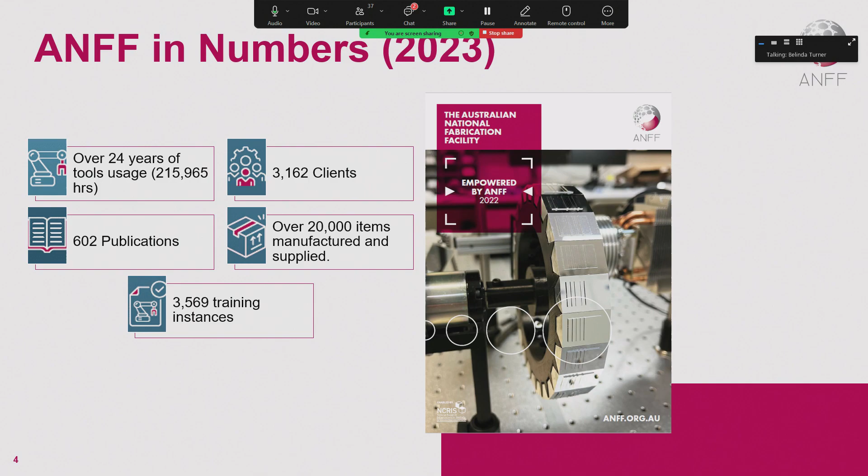So the federal government, the state governments, the universities pour money into this so that you get access to the people and the tools that get your research to where it needs to be. This is an incredible program, one of the most unique in the world when it comes to research infrastructure. This happens not just in micro and nanofabrication - it also happens in microscopy, astronomy, urban databases, environmental monitoring. So there's a huge amount that's not just in this area. If your research area needs help with research infrastructure, there's probably an NCRIS capability that can come and help.

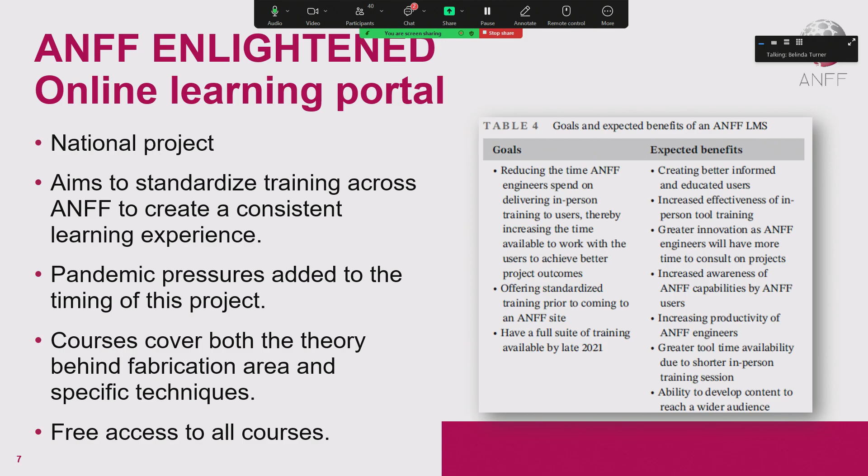So feel free to jump on there, get some of the basics from some of the things that you didn't get access to this week, because you're here for 4 days. This is a packed 4 days, but there's so much more out there, and some of that is available on ANFF-Enlightened. It's free. There, the button. That's where the button is on our website.

So this is our initiative to try and get some of the research projects that we know have market potential a little bit of a leg up, to do a manufacturing feasibility study to show an investor that this can be made at scale, or a market analysis to show that there is a market that will pay for this at the level it's going to cost. So we're trying to do that with some of the projects going through.

And with that, I'm going to stop talking and introduce you to your next speaker. Yeah? Okay, so I'm just getting the nod. So our next speaker is from the state government here in South Australia. Dr. Judy Halliday has been instrumental in supporting research infrastructure and shaping how that investment is coordinated, how that investment is going to bring value into this state. She has a long history in being a friend, for want of a better word, to the research sector and the innovation sector. And she's going to talk today about how innovation is essential in a complex and uncertain world. So thank you, Judy.

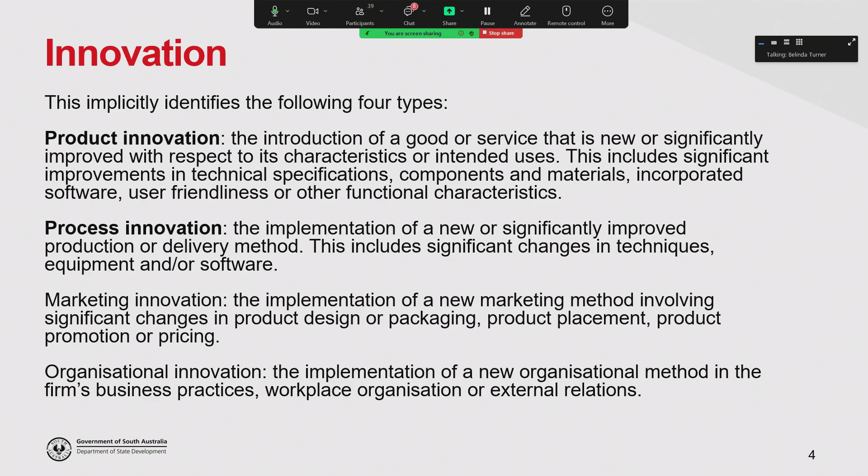However, out of 43 countries, Australia is not in the top 10 for having lots of innovative firms that develop innovative products and services. As a percentage of total firms in Australia, about 21% would be considered to be innovative. Let's think about Canada as a good comparator for Australia. It's a similar sort of country in that people kind of live around the edge and there's a lot of digging dirt up and mining and farming. Canada's probably a bit more economically similar to Australia than some of the other comparative countries you might hear about when we talk about innovation: the United States, particularly Silicon Valley, or Israel. Finland is another one, but Canada's probably a bit more like us.

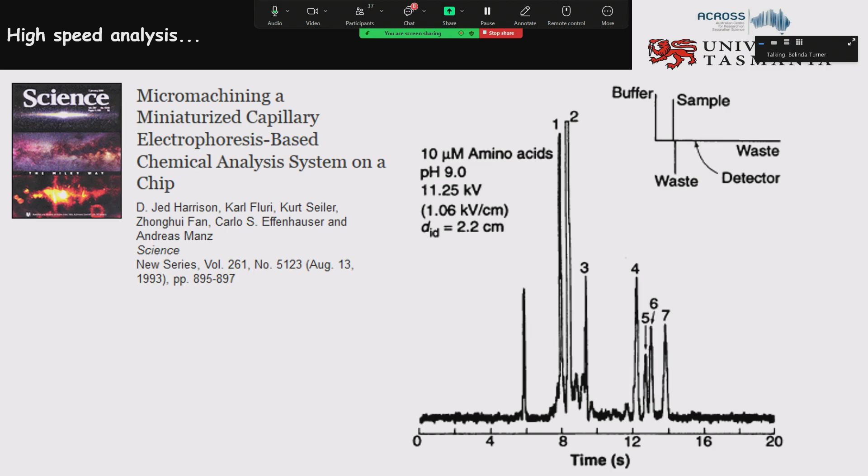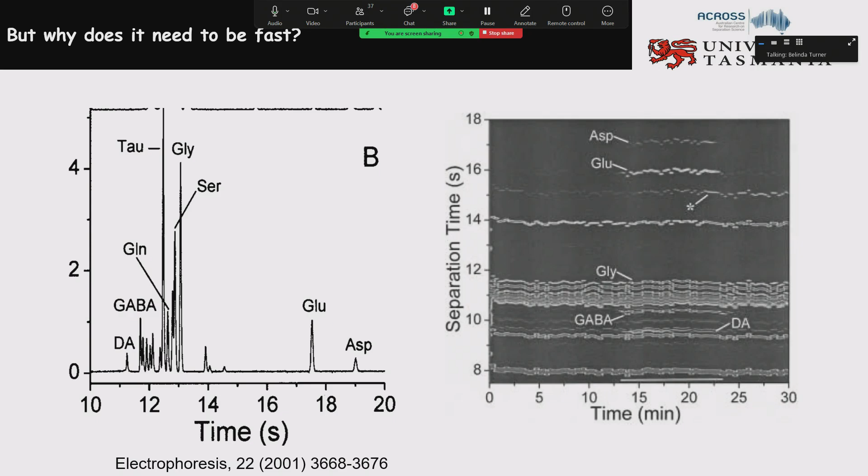So we can now understand brain chemistry because we can do this highly integrated measurement in a really quick format. Why would we want it to be portable? Right? So one of the advantages of making it small is we can take it everywhere, right?

You guys are probably too young to remember life before mobile phones, where you had a landline, you might have seen them on television. Some of us might be old enough to remember the first mobile phones were about the size of a brick, probably weighed about the same as a brick. And now we've all got them really small, right? We just throw them around everywhere because they're super light. We drop them and they don't break, right? That evolution in technology to portability, why is that useful?

So one of my favourite examples of why we want to make chemistry portable is to send it into space. So if we send it into space, and this is particularly looking at amino acids on Mars, to answer that really critical question that everyone wants to know: is there life out there? So if we can take something and send it to Mars, we can actually find amino acids, right? Problem is, it's really expensive to send stuff to Mars. So if it's really heavy, it's not going to go well, right? So you want to make it really small, you want to make it really light, so that you can get it there and answer the questions you want. Right? So size is really important.

One of the things that we often don't think about, though, is this little thing that we've made. How do we use it? And this is called the chip-in-a-lab syndrome. So you can see the guys on the right there, they've got that little thing on the microscope, and they need the world around it to actually power that little business. So what hopefully you're going to consider now is not just the little thing you're going to make, but the way in which you package that up, the way in which you put everything together.

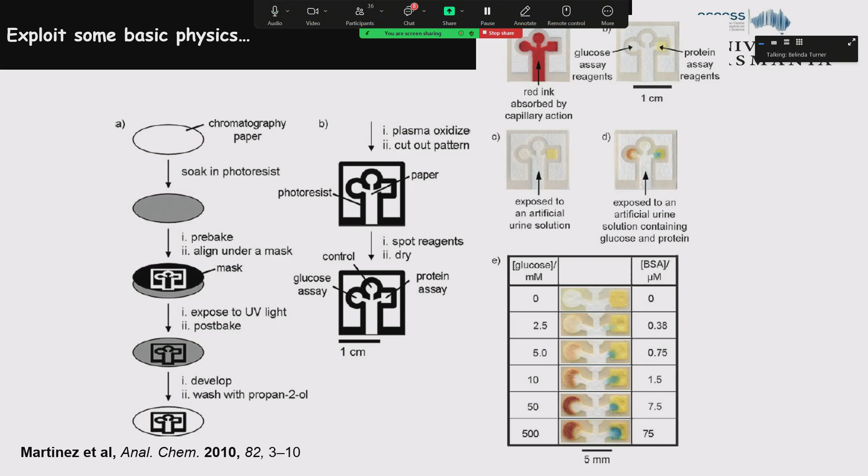So we can do wonderful things like make COVID-19 diagnostics that save the world. It didn't really save the world, but everybody knows about a rapid antigen test. That is essentially a paper fluidic for us. Right, so really simple concepts can be really powerful and let us do important things to change the way we do things. There's another way that we can detect things.

The answer is yes, A+, A positive. That ability to be able to read the answer from your questions is really a simple thing by using your eyes. Right, so this is not particularly challenging science, but it's particularly clever thinking, in that it's an intuitively simple step to read the answer to the question you want to know. Is my drinking water contaminated with E. coli? Yes or no? No, you don't care about it. If it's yes, you might want to get to the hospital pretty quickly.

The other detector element that we have nowadays is...

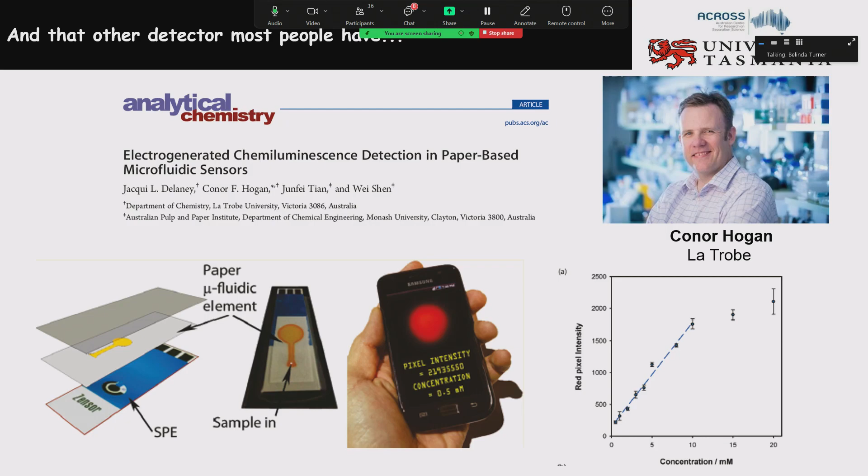So the other unique thing about microfluidics is that as we scale down, we get some unique phenomena.

I need to start the timer. Damn, you'll just have to keep your heart rate.

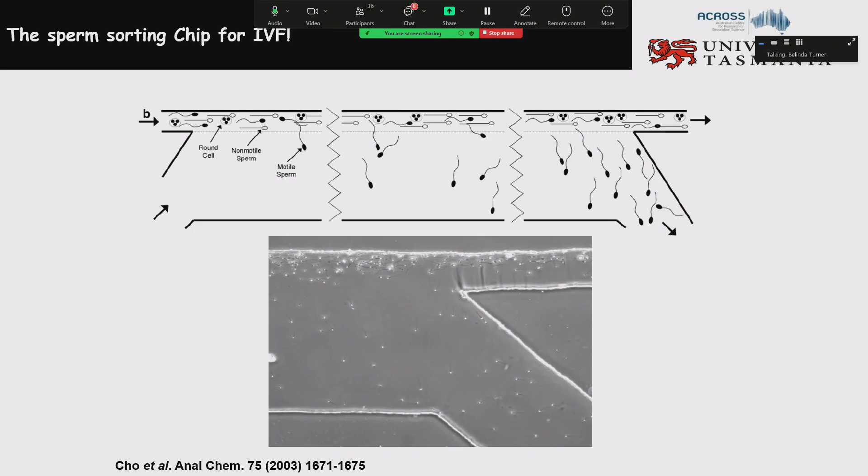My favourite example, though, is not Craig's. It's good, but it's the sperm sorting chip. Right, so this is a device that uses that laminar flow. We flow in sperm at the top left there. If I go back and see the video again. And the really high mobility sperm swim out of that laminar flow stream into the deep one down the bottom, and then you collect them. And you know they're good because they swam out from the other ones that are not so good. So you collect sperm based on how active they are, and that's just what you want to do in IVF. So I first heard about this in about 2007, and at that stage they just had their first baby being produced by this, and now this is one of the most common ways to select sperm for IVF.

Very simple device. Also using that laminar flow device, we can start to think about creating artificial organs. So this is an artificial spleen. And we use those two fluids and we move particles from one to the other. And on the particles we have some antibodies, some affinity to a pathogen, for example. And so we put that into the blood. We then use a magnetic field to separate those particles out, and then we put the blood back in. Presto, you're miraculously healed. This was actually developed by DARPA in the US, for defense, the treatment of soldiers, and had some ridiculous amount of funding to try to get it to work. And it does work. But we're now going beyond the spleen.

So we're now looking at what else we can do with biology. What other parts of the body can we make? Can we make a lung? Can we make a heart? Can we make a kidney? And what's even more important, because we're making microfluidics, we connect them together. So can we make an artificial person that has all of the essential organs of a person, on which we might be able to test some pharmaceuticals? So can we collect those stem cells? Can we differentiate organ cells? Can we put them into little microfluidic devices? Can we then see what kind of drugs you might be susceptible to, to treat a particular disease that we've managed to initiate in that little microfluidic version of you?

When I was a kid, this would be science fiction. This is almost science reality. We're not quite there yet, but we're really, really close. Justin Cooper-White in Queensland has been looking at some of this, particularly taking stem cells and looking at how the stem cells differentiate down through the microfluidic device, what a particular generation of stem cell does to the next generation of cells, how they then develop into different organ cells, and the little microenvironments and chemistry of these important cells.

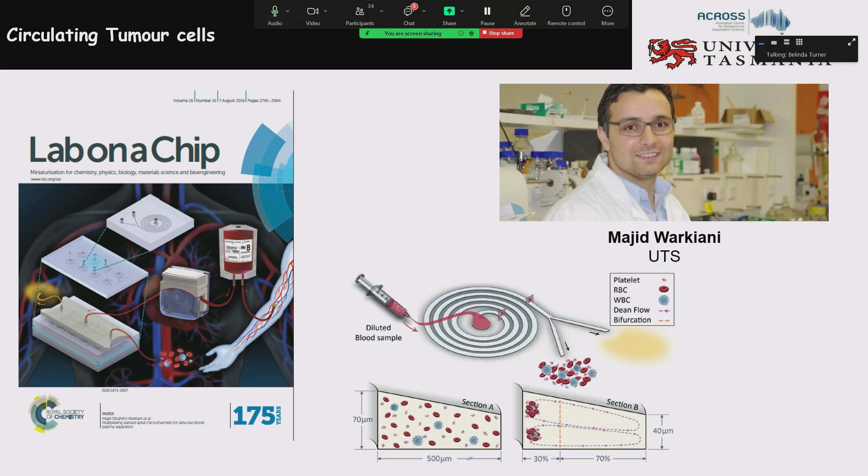Majid at UTS has been looking at cells in a different way, looking at circulating tumour cells for diagnostics. When you have cancer, we have surgery to remove it and try to get as much as possible, but it's possible that some cells get released into your bloodstream and circulate around the body and metastasize. He's developed a microfluidic device based on the physics of that particular geometry that will actually remove all the circulating tumour cells from your blood in about 2 or 3 hours. It's kind of like a dialysis machine: you have your surgery, connect it up to this, and hopefully remove all those cells that were disrupted in surgery. Your blood goes back into you, and hopefully you have a better recovery. This is being commercialised out of Singapore.

David Inglis at Macquarie University has been looking at different ways to separate particles, similar to the cells, and similar types of things that you can do to what Majid was doing with cells, but with different types of particles in a different way. Combining these different physical shapes and designs, you can achieve a whole heap of really interesting phenomena to achieve something that you might want to achieve. I don't know what you want to achieve - you don't know what you want to achieve yet - but there's a whole heap of ways you can do that with microfluidics.

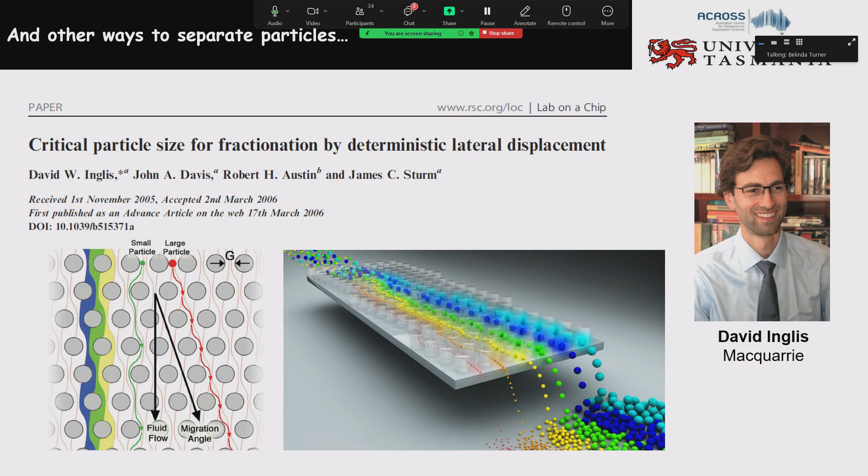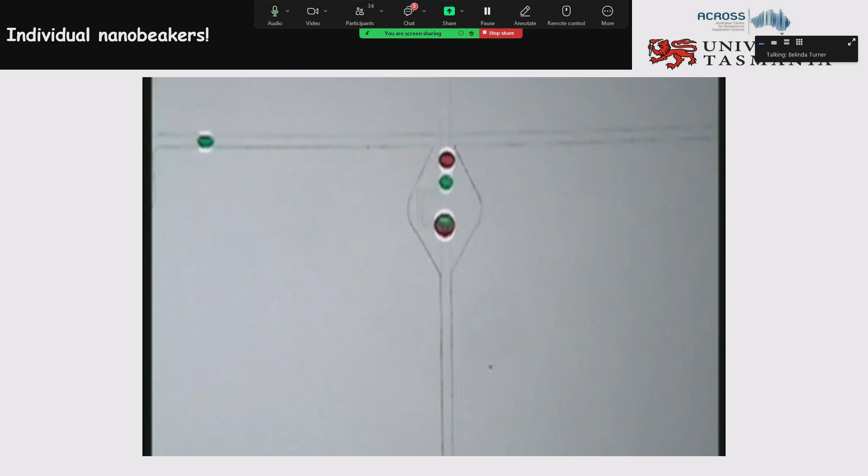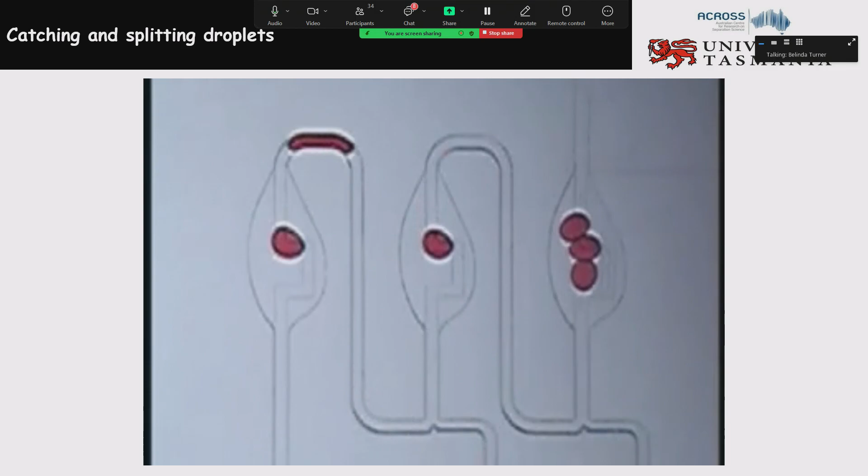We can also do chemistry in beakers, and these beakers are nanoliter in size. Think about your 1 litre bottle of Coke - divide that by 1,000, you get a milliliter. Divide that by 1,000, you get a microliter. Divide that by 1,000, you get a nanoliter. These little green and red droplets here are nanoliter size. So we do chemistry on really small volumes now, which is interesting because the kinetics of that reaction become quite efficient at low volumes. We can collect droplets and split droplets - this is all defined by the physics, not the chemistry. The physics of the shape of the droplets determines what we have. We can capture droplets, and make thousands and thousands of droplets a second, all doing maybe the same reaction, or even more interestingly, all doing slightly different reactions, and then look at how that changes in each particular droplet.

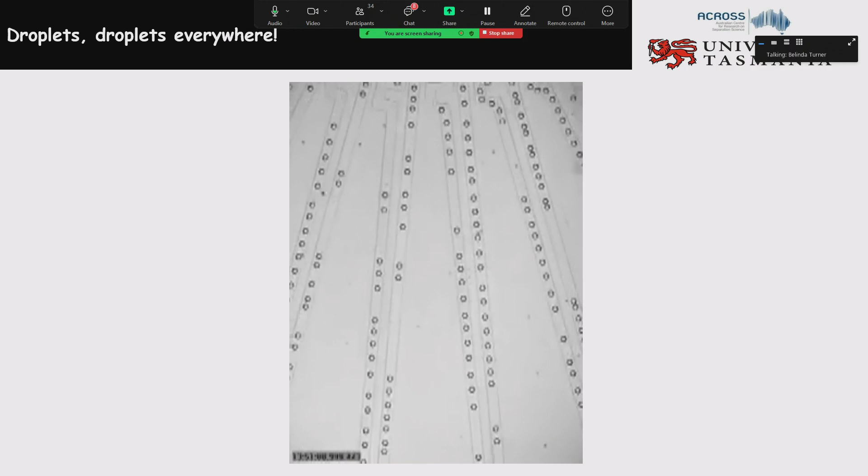One of the really nice uses of single droplets is in STR profiling for forensics. When you have a rape case, you're looking for male sperm in a large selection of female cells. If you just stick it all together and analyze it, you get a really large signal from the female cells. But if you enrich those cells in their own droplet and do the reaction, you get the perfect chemistry and response from lots and lots of female cells, maybe 1 or 2 male cells. Because the male cells appear in their own little droplet, you can find it really easily. That means you can process rape cases much more quickly than you have been previously. This is a very interesting technology that has also been commercialised in the US.

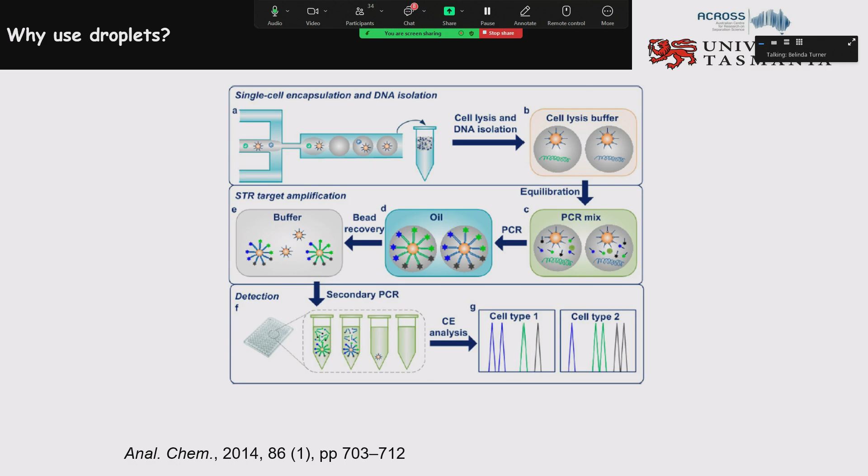Nam-Trung Nguyen from Griffith University has been doing some liquid droplet studies, called liquid marbles. This liquid has particles on the outside, and because of that, they're quite stable. That means you can do some really interesting things with those as well.

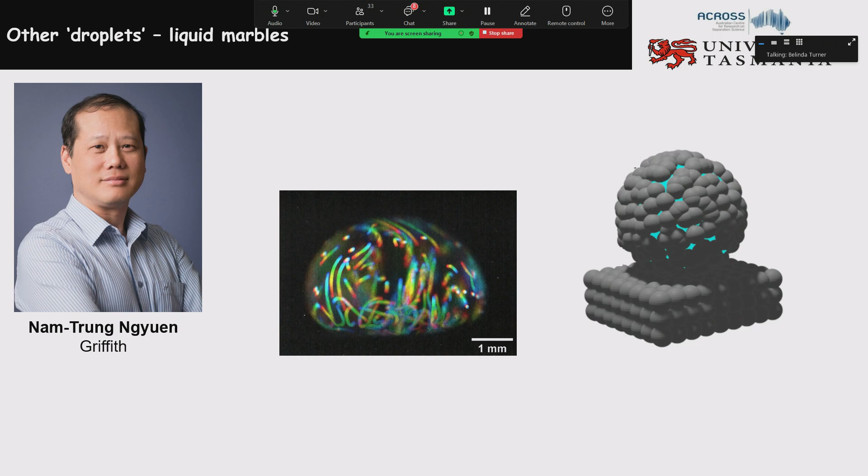Again, all of the chemistry is defined, and in this particular case, if you actually put some of the chemistry on the particles, you can then not only have these particles protected, you can do some very interesting reactions on the inside. To make all of these, you could go anywhere else, or you could just stay in Adelaide.

You've heard already that ANFF is a great place in Australia, but a lot of the things that I've shown you here can be made right here in the lab. In fact, you will learn how to make any of those things over the next couple of days. Nothing I've shown you here is particularly fancy, but it requires a level of infrastructure and capability that is really excellent in this particular place, so please take advantage of it.

When you've figured out what you want to do, how to do it, and made it here, then you can go into Melbourne, where there is MiniFAB, one of the largest commercial microfluidic manufacturers in the world. They were developed in Melbourne. So ANFF has got the capability to prove your idea, and MiniFAB in Melbourne has got the capability to take your prototype and bring it to the world. This is really a wonderful place to be in.

I'm a bit sad I'm not young again, but I'm also pretty happy I'm not young again. I'm old enough that, yeah, let's not go into that. So with that, I'm going to finish there, and I'll wait and see if there's any questions. And if not, I've got some things we might be interested in, you might be able to choose one, and I'll let the chair decide.

Right, Craig says we have time for one vote. Who would like to see—I'm not going to ask, I'm just going to show my favourite one. Sorry, I'm just going to get rid of them next year, assuming I come back next year. Oh, hang on. It's got to be the robots, right?

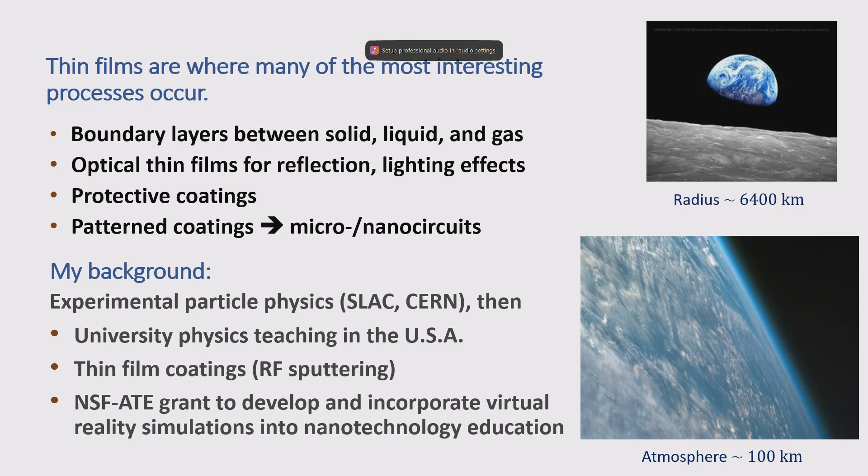Very important. They're all involved with this process of how do you coat a very thin layer of material onto a substrate. I'll just mention that my background started in quite a different area, and it went off into a different field when, at my local university, the department chair said, 'We have an old sputtering machine here that no one has ever been able to operate. Can you make it work?' And so I did, and got some students involved with projects on it, and that's why I'm here.

Okay, I'm going to cover this topic in the traditional form of two basic types of thin film vapor deposition: physical vapor deposition and chemical vapor deposition. I'm a physicist, so I look at things from a physics point of view. And that can be very advantageous in many of these processes because the physics is very important.

Under the physical vapor deposition processes, which are direct transfer of a material from a target or source material onto a substrate, there are the topics of sputter deposition and thermal vapor deposition, the two most important ones, and I'll also mention the other ones that use electrons and ions in order to assist with the deposition process, and lasers.

Chemical vapor deposition, perhaps one of the most commonly used in industry at least. Chemical vapor deposition processes, and also the enhancements that are used in this methodology, such as plasma enhanced and microwave enhanced chemical vapor deposition. And then I'll touch on atomic layer deposition, really the key to being able to go to the ultimate in miniaturizing circuits and hopefully keeping up with Moore's law.

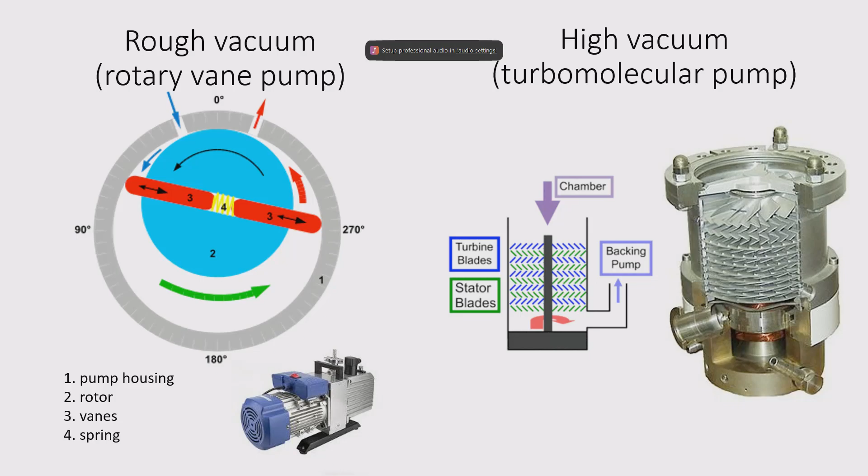Okay, so you'll see a lot of those kinds of pumps here at the Institute. So let's cover the first topic, one of the simplest ones, thin film deposition by evaporation. So with the high vacuum that's created, now this laser, let's see.

Unfortunate thing about the laser is then it only will highlight one screen. So the chamber that you see there, where the evaporation is happening, there's a crucible at the very bottom that has the source material. And it's literally turned into molten form by high temperature, but it's inside of a vacuum, so it can actually boil. And molecules and atoms will come from the surface by simple evaporation process.

That's important because the speeds with which those atoms or molecules are emitted are thermal velocities in the range of perhaps a few hundred meters per second. That's how fast they're moving. That's still quite fast. So the molecules or atoms are emitted, in this case, in the upward direction. They'll simply strike the substrate that you're trying to coat, and they'll stay stuck there. So you can imagine if they run into a surface at hundreds of meters per second, there's a good chance they'll embed, and you can create coatings by this simple method.

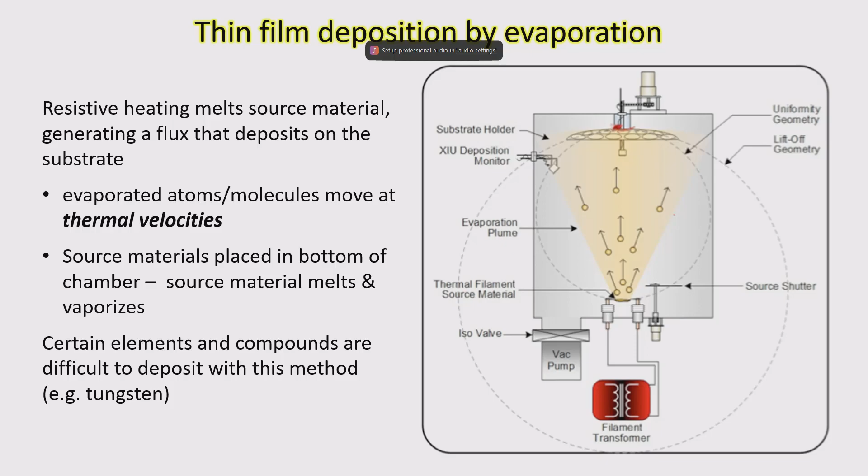It has its limitations because you need to melt whatever it is that's in the crucible in order to get it to transfer from the lower to the upper. So tungsten, as an example, because those boats, those crucibles that hold the material that you're melting, they're made of tungsten. So how are you going to melt tungsten inside of a tungsten crucible? But nonetheless, it's a very common method still in use.

Thin film deposition by sputtering, perhaps one of the most important ones for physical vapor deposition. So this is a ballistic transfer of material where you simply take material that you want to transfer into a thin layer onto a substrate, and you bombard it with something. So you're dislodging atoms or molecules, individual ones, lots of them, however, and they're flying off across space because they've received momentum transfer from whatever medium that you're using to do the sputtering, and again, they embed on the substrate that you're trying to coat.

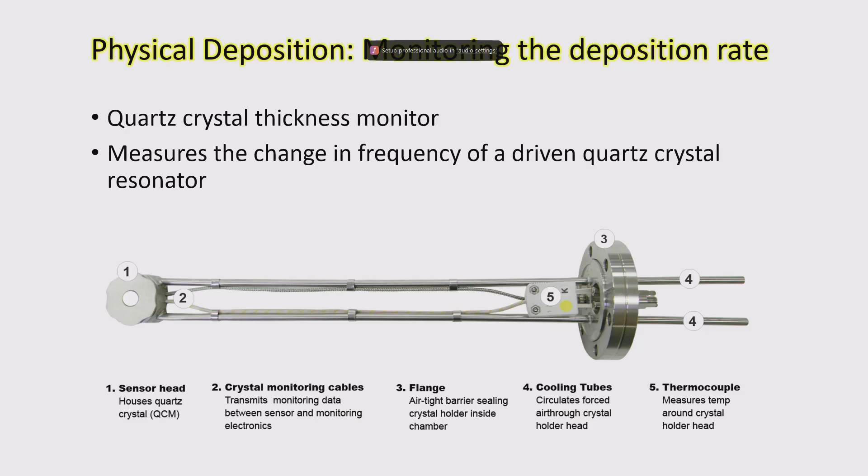Okay, those are the physical vapor deposition processes. I want to touch on now the chemical vapor deposition processes. So they operate in a completely different way. They, of course, start with a good vacuum as well, but then you introduce gases that can react chemically inside the chamber. That's the key thing. Physical vapor deposition, no chemical interaction. But chemical vapor deposition, that's how it works.

And in particular, you can produce polymers this way by injecting monomers, even combinations of monomers, in a rarefied form into the chamber, and then have them react and coat the surface. You see, it's quite different because it's like a gas is developing that's not moving at hundreds or thousands of meters per second. It's simply a gas that's not static, but with very low circulation inside of the chamber. Therefore, the nature of the coating is quite different from what you get from the physical vapor deposition processes.

Many of the most common applications for chemical vapor deposition, they're so prolific around us that we don't even know that they're there. These pieces of potatoes, which I think are called crisps here, not chips. The potato crisps are inside of a bag that preserves the freshness of the chips by having a very thin layer coating of metal, in order to make sure that light doesn't degrade the chips and so on, so that they stay fresher for longer. This is a very common use of this technique.

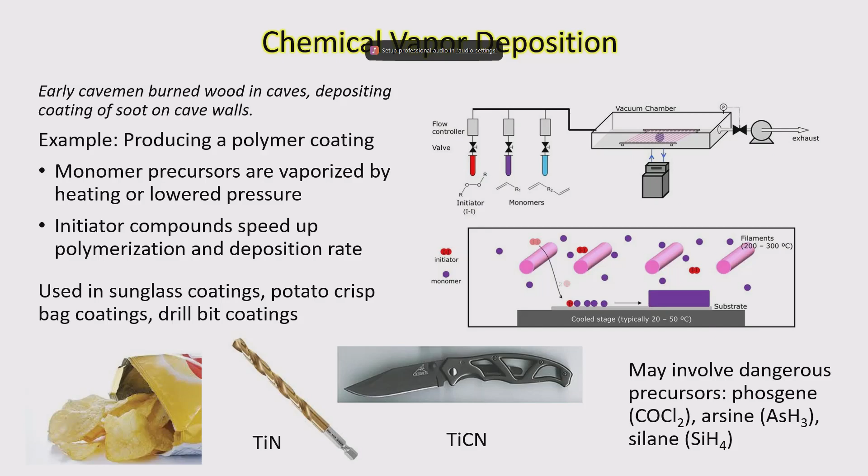These processes are interesting. You know, if you come into the building here, you'll see very impressive placards that say you're about to enter a building where you've got some potentially nasty chemicals, okay? And yes, they are used for CVD. So some of those there are extremely dangerous: phosgene, arsine, silane. I've heard stories about what happens. Silane will burst into flames spontaneously when exposed to the air. So that's on top of its poisonous properties anyway. But they're just the thing that you need in order to do these kinds of chemical vapor deposition.

You can enhance the process then by using plasmas and microwaves as well. And also, as with physical vapor deposition, you can influence the quality of the coating by the temperature that you apply to the substrate. So all you've done in addition to the chemicals is you added this plasma, which can enhance the rate of deposition, or microwave enhancement as well.

So again, I want to emphasize the difference in the type of physics. CVD, I think of it more as an enveloping vapor that's filling the chamber and coating everything that it settles upon. But PVD is more of a ballistic process where you're shooting molecules or atoms at the substrate that you're wanting to coat.

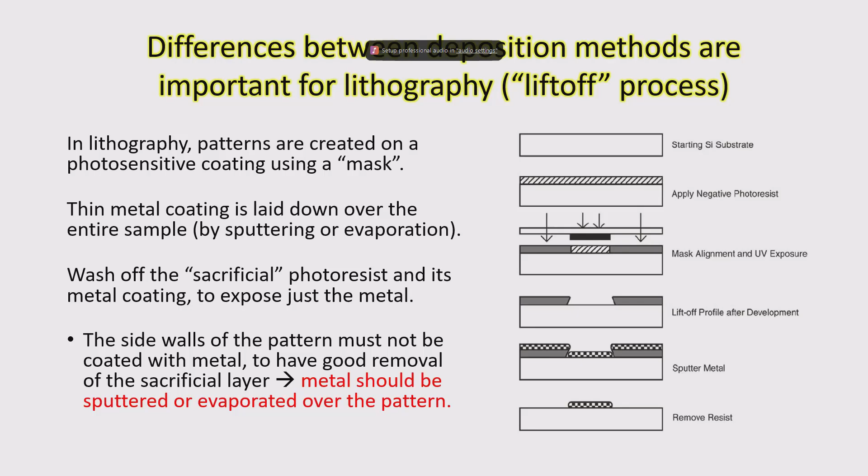The last process now that I want to touch upon is atomic layer deposition. Very important. This is getting now down to the point where they're controlling deposition at the atomic layer across a substrate. So with the correct combination of chemicals, there are many variants of this, many different combinations of chemicals that you can produce to give a given coating. In this case, it's aluminum oxide.

So you'll see that a surface is first prepared with an activating process. In this case, there are hydroxyl radicals with the oxygens attached to the surface, exposing the hydrogen atoms. Then you can introduce a compound, in this case, trimethyl aluminum. It's an aluminum atom with 3 methyl radicals attached. And they will attach, but only at those places where there's an exposed hydrogen at the surface. And therefore, only one molecular layer will be deposited. Once a given site is taken, no more molecules will attach there.

So you'll have a nice single layer, a molecular layer of material that's deposited by this chemical. Then next you can do a simple exposure to water, and it will bond again, but only at those individual sites. So layer by layer, and then you can continue the process. Layer, next layer, and you can build up atomic layers of material. So this is very important in being able to scale down devices to ever smaller levels that are necessary in order to produce, for example, semiconductor chips.

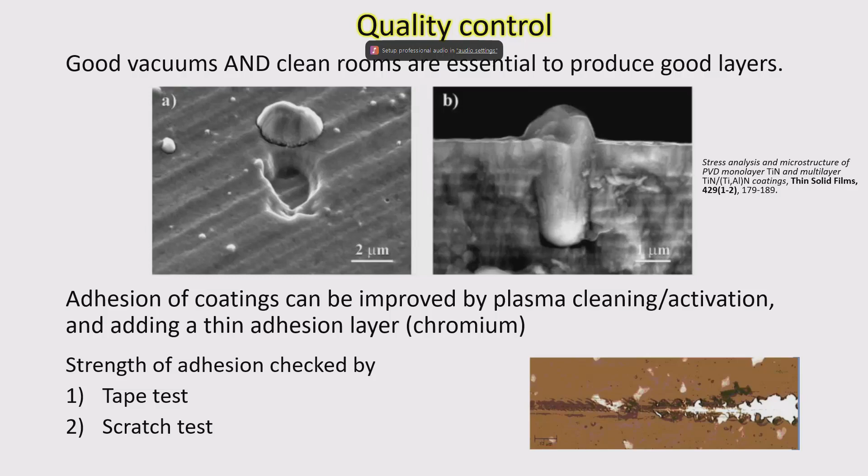It doesn't stick. But do some plasma cleaning, and also apply that chromium layer, and it will stick very well. The strength of the adhesion is checked by some very complicated tests. No, it's not that complicated. A piece of tape. You simply take a piece of tape and pull on it and see if the coating sticks. There's also a scratch test, and that's illustrated here, and you can imagine what that is. But really, there are more methods that are a little bit more rigorous and quantitative for assessing the adhesion.

So that leads me into the next topic of inspection and characterization. So electron microscopy is very important in this area in order to see the quality of the structures. Thickness of layers measured with profilometers. Here I've illustrated a stylus profilometer, very common, where a tiny needle drags across the surface and it can measure thicknesses of films down to few nanometer levels. Ellipsometry is very important for assessing the thickness of transparent layers.

And I've mentioned resistive measurements and also hardness measurements. Here, the hardness measurement is a little bit better assessment of the quality. Use a nano indenter or a micro indenter to put a dent into the surface and to see how big is the divot that is left behind from this indentation process. And it's a measurement of how hard the coating is that you put down.

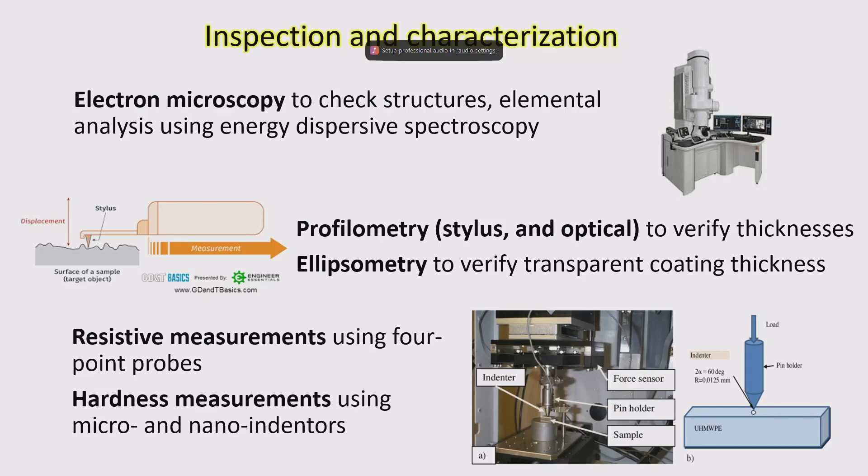Examples of thin film coatings. An anti-reflective coating, very valuable if you want to take pictures of people who are wearing glasses so you don't see a bunch of glare in the face. That's achieved by putting down a coating that's about a quarter wavelength of the average wavelength of visible light in order to extinguish the reflection.

Here at Future Industries Institute, a number of different applications that you will see as you're here, and you should talk with these professors more to see about the work that they've done. So Professor Colin Hall here has done a great deal with producing polymer mirrors of very high hardness, and they're used now in Ford trucks, in F-150 trucks. Better than glass, because glass can scratch, and glass breaks because it's so brittle. But these mirrors, no, they're much more resilient.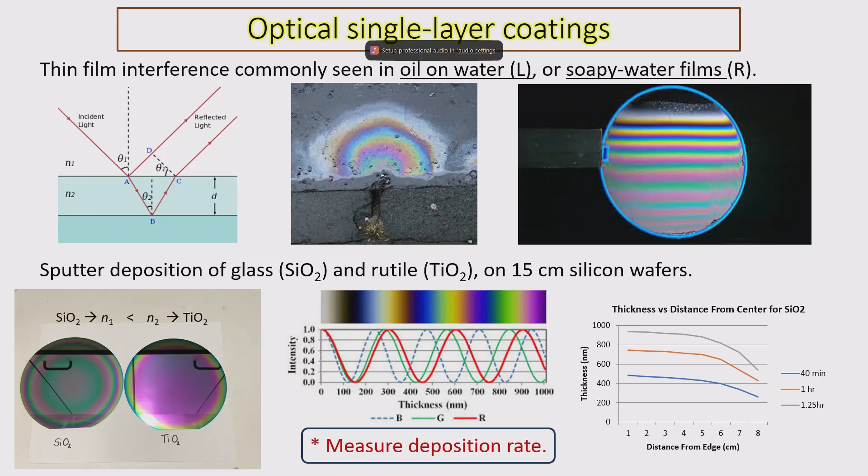Okay, thank you. Almost there.

In this case, we took alternating layers and decided to build many of those. There's a beautiful program called TF-Calc which you can use to simulate optical coatings, and my student used that to design this mirror. So this is what he did.

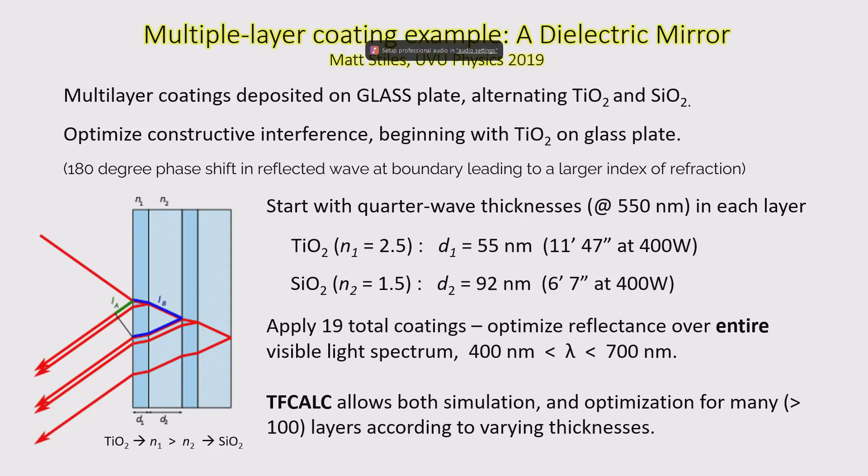These things are possible if you increase the number of layers. TF-Calc can do 100 layers. This is just a fun gee-whiz example I'll close with - a contrasting example. What if you wanted no reflection happening?

This is a material called Vantablack that you might have heard of - the blackest material that people have created. It works by absorbing all the visible light that comes onto it. How does it do it? The students we had said, let's see how it works.

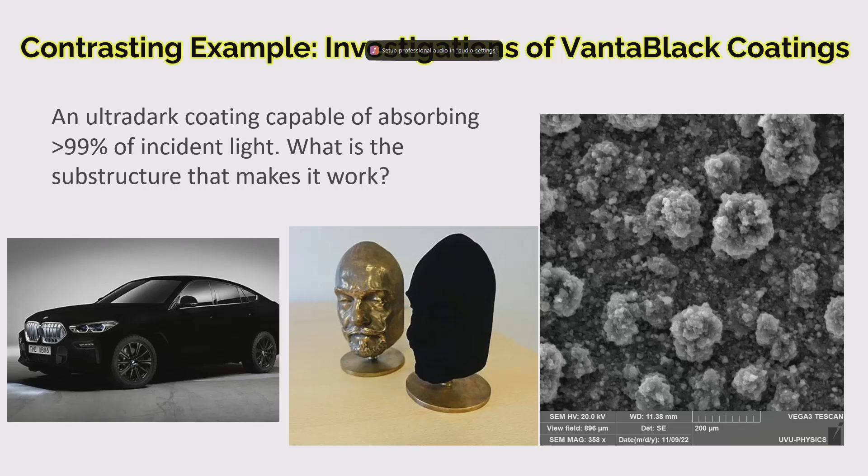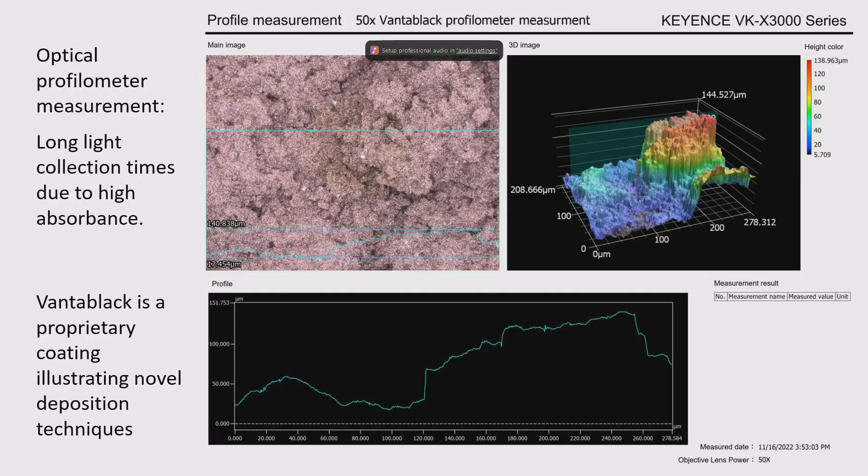This was actually done with an optical microscope, but they had to run it for many minutes because Vantablack absorbs almost all of the light. You can see the size and structure, both in terms of the lateral dimensions and depth dimensions - it's a profilometer microscope. Okay, I'll conclude now.

There are many important applications in nearly any direction that you look. If you have any sort of cell phone or computer, they're everywhere. So the applications - perhaps the most important field - generally semiconductor chip manufacturing, of course.

New coatings are being developed all the time, and I found the experience of working with a student to tweak the 19 layers of this multi-layer coating to be very instructional, because it shows there are new things still to discover, new coatings that can be produced. Of course, here at this institute, they are champions in that. I hope you take advantage of all their expertise to learn as much from them as possible, and the things they have already done in developing new coatings.

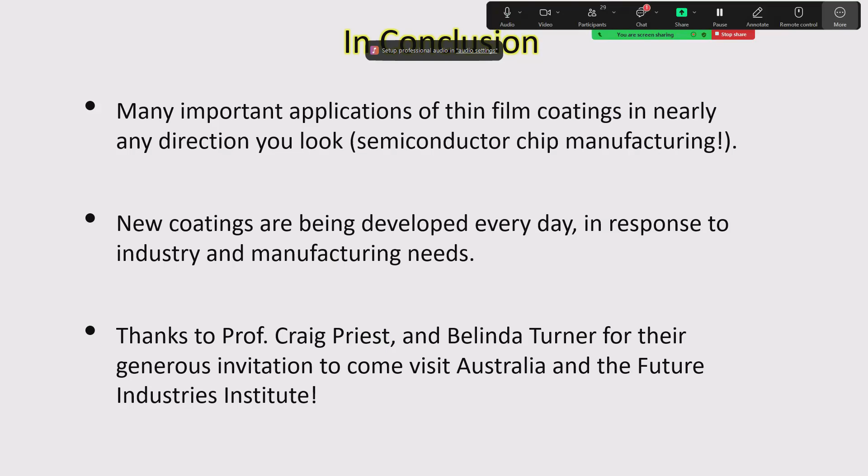This might be for you and Professor Craig as well. Can we coat the inner channels of a microfluidic chip with thin film to reduce the surface effects? That's a great question. The inner channels, I think, would be different - certainly not by thermal vapor deposition or sputter deposition. You might have to go to a different kind of technique. Perhaps something like electroplating would be an option. I didn't talk about that, but you can cause transfer of materials to coat surfaces just by having the right solutions of electrolytes. I don't know if Craig has ever fielded that question before - perhaps he wants to add something.

I was multitasking, I'm not very good at that. The question is, can you coat inside the microchannels? What you can do - if you use a chemical approach, like in wet chemistry, that's ideal because you can flow through and get the effect you're looking for. But often what we'll do is have two halves, so if we can coat both and then do some bonding, you can trap that surface chemistry in the channel during fabrication. There's a really nice talk on Friday about packaging and the different bonding techniques. Bonding is incredibly challenging, it's the most underestimated step, so make sure you pay good attention on Friday because that can be the secret to making that work or not.

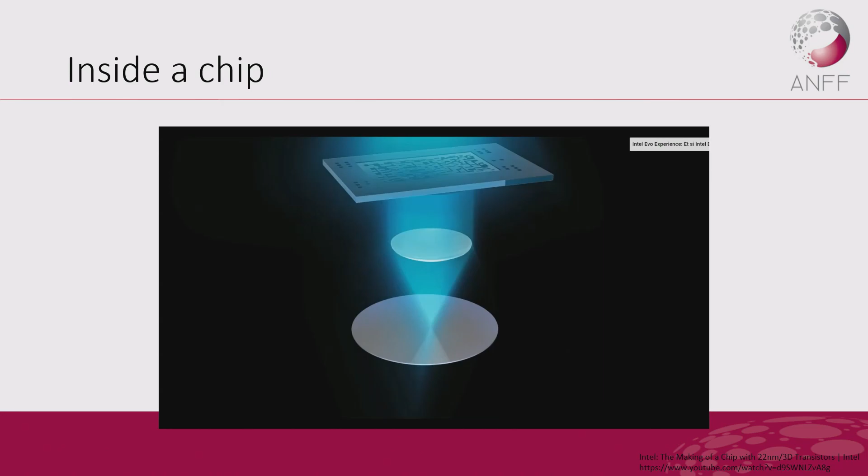So let's have a quick look at how a chip is made. You can see we have the sand, we use this sand to grow the crystal. After we grow this crystal, we slice them into wafers as a thin film, and then we coat the photoresist on top. We use a mask to expose the pattern. After the inspection, we can deposit, like sputtering, some metal on top. And after that, you can see it's not just one step of photolithography - there are multiple steps, so you can create things like computer chips, which you use in your phone or computer or any electronic devices.

So you will create multiple chips on the wafer. After this, you will do an inspection, then dice it into individual chips and package them. Then you can use them in your electronic device.

Okay, let's talk about the elements in photolithography. I like to think of this process like a party. For your party, you need a special room. In photolithography, we need a yellow room to accommodate our material, because the material we use is light sensitive, so we need to block out all UV light. It's just like your special room in your party.

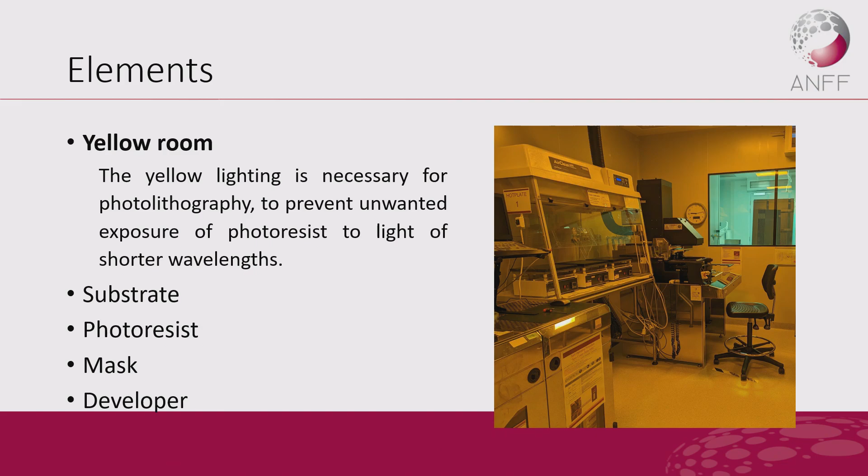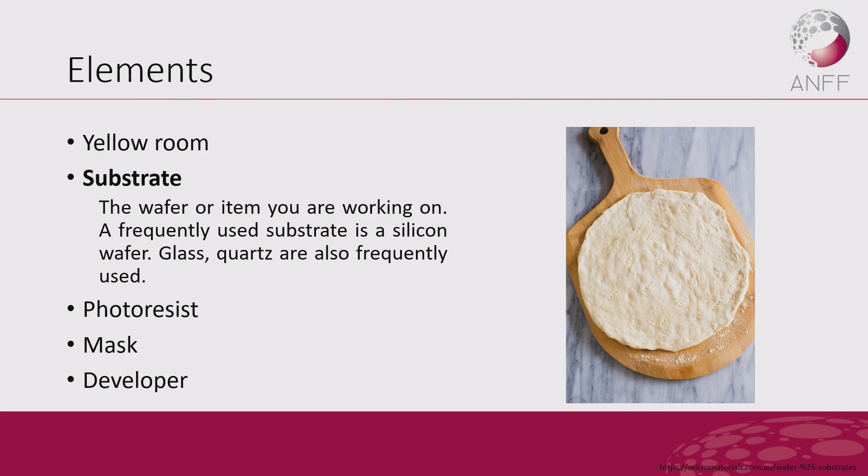Then we need a substrate. Imagine when you're going to have a party, you need to serve some food - let's say pizza. This pizza base is just like our substrate. It's the circle, round, big thing. Let's call it wafer or substrate, often silicon, glass, or quartz substrate.

After you have your pizza base, you need your pizza sauce. This pizza sauce is just like the photoresist in our photolithography. You will spread it onto your pizza base and then put it into an oven. Just the same, our photoresist will have two different types.

We have two different types of photoresist: positive and negative. The difference between them is one will dissolve in the exposed area when developing, and the other will dissolve in the unexposed area when developing. So you will use a photoresist based on your application.

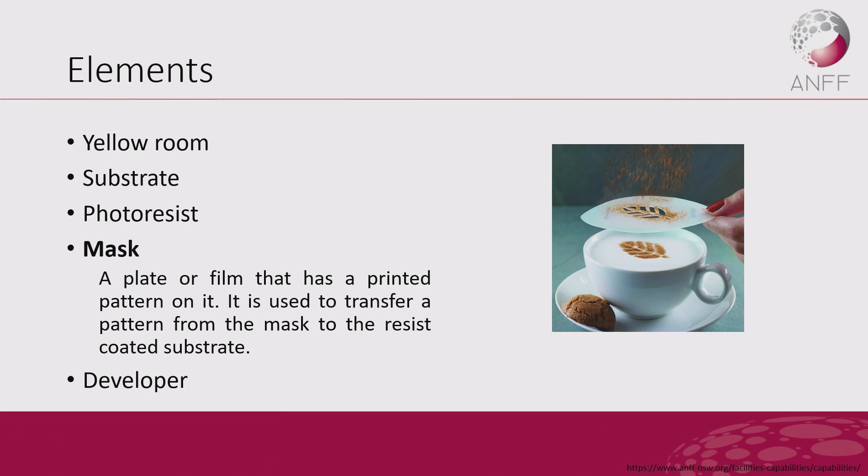And the next is the mask. Let's say in our party we're going to serve drinks and cake or desserts - you'll have a sieve. This sieve changes the pattern from the sieve onto your coffee or your cake. Similarly, this is the mask. The mask base material is glass, with a chromium coating on top, and we create a pattern. This pattern we can transfer onto our substrate.

After that, we have our food, drinks, cake, but you need to face reality. In your party, it needs to come to an end, and by the end of the party you create a lot of mess. Now you want to clean it up. So developer is just like the cleaning product for our party - it can wash away anything you don't want.

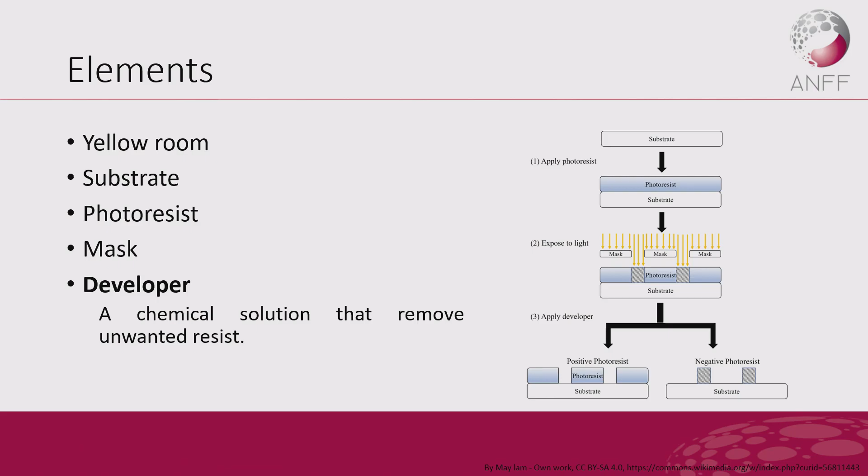Okay, now we have all the elements for our party, for our photolithography process. Let's talk about how we do this photolithography. First is substrate cleaning and preparation. Next, we apply our photoresist and do the soft bake. Next, we do the exposure, or post-exposure bake if needed. Then we do development and visual inspection. After this is basically the photolithography process - now we can do some downstream processes.

Let's start from the beginning. First we need to clean the substrate. There are multiple ways to clean it up. First, when you get a substrate, you might get moisture or water on the surface, so we can use a dehydration bake to remove all this moisture. This is often done on a hot plate or in an oven.

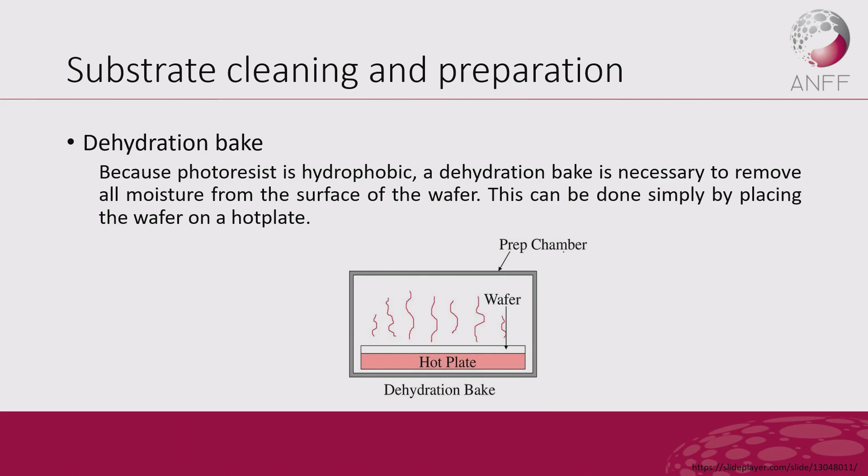After cleaning, sometimes we need an adhesion layer to adhere our substrate and the photoresist - it's just like a glue. To increase adhesion, we sometimes use a material called HMDS, which we apply onto our wafer.

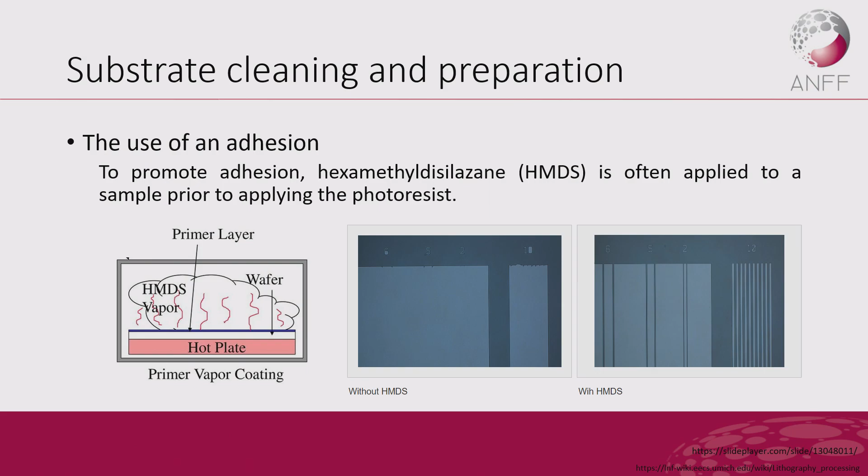After you prepare your surface, it's very clean and you have an adhesion layer. Now the next step is coating the photoresist. There are two ways in our lab to coat the photoresist. The first way is to use the spin coater. We just apply the photoresist on the top of the wafer and then spin it up.

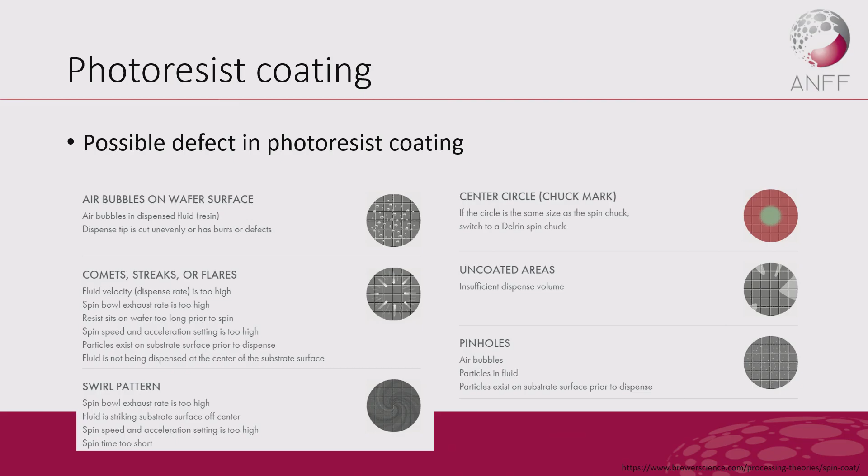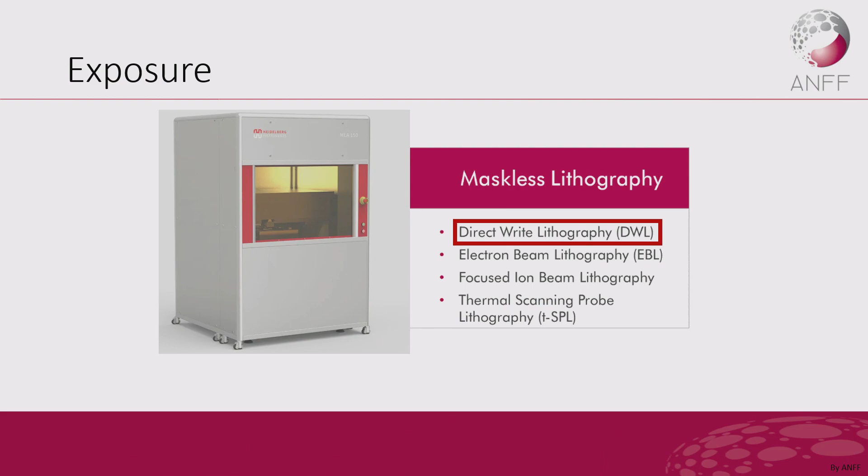After exposure, you can also do some QA inspection. There are some possible defects in the exposure. There's overexposure if you use too much light, and underexposure if the light is not enough. So overexposure: if your light dose is too high, you will create an overexposed pattern. If the dose is too low, you will cause an underexposed pattern.

And just like we said, we have different layers of photolithography, and you use alignment marks to align your pattern. If the alignment is not correct, you will create a misalignment pattern. Once you have a misaligned pattern, there is no way to keep going. The best way is to wash away all the photoresist and then do it again.

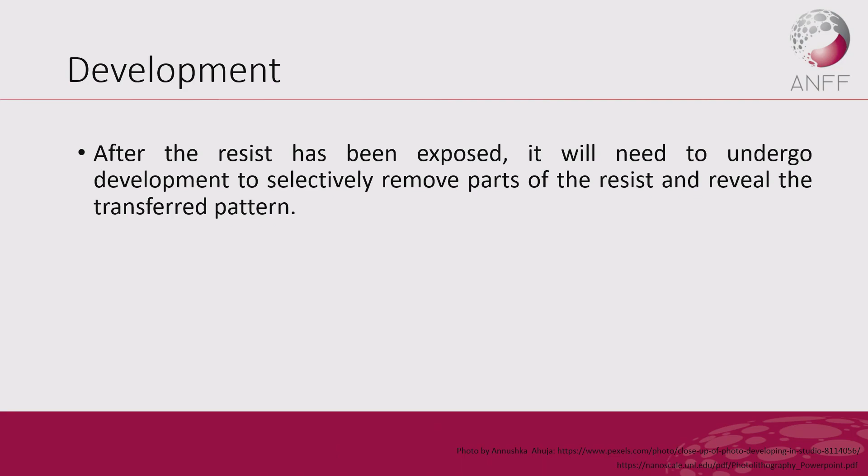So it's just like old camera film. I have never done this. You develop these pictures in a dark room, and then you reveal what's in the photo. It's the same thing: we put our substrate into the developer, gently shake it, and it will wash away all the photoresist we don't want.

And after development, something can go wrong here. If the development time is too short, you will get an incomplete development, and then you will have some photoresist still on the bottom of your substrate. And just like the professor said, when you are going to do some sputtering, if there is photoresist on the bottom of your substrate, when you remove this photoresist, your pattern will just all wash away. And this is incomplete development.

And the other one is over development. If you put this substrate into your developer for far too long, your pattern will become bigger or maybe different from your design. The under development is that you didn't develop it completely. The over development is that you will create a bigger pattern, or one different from your design.

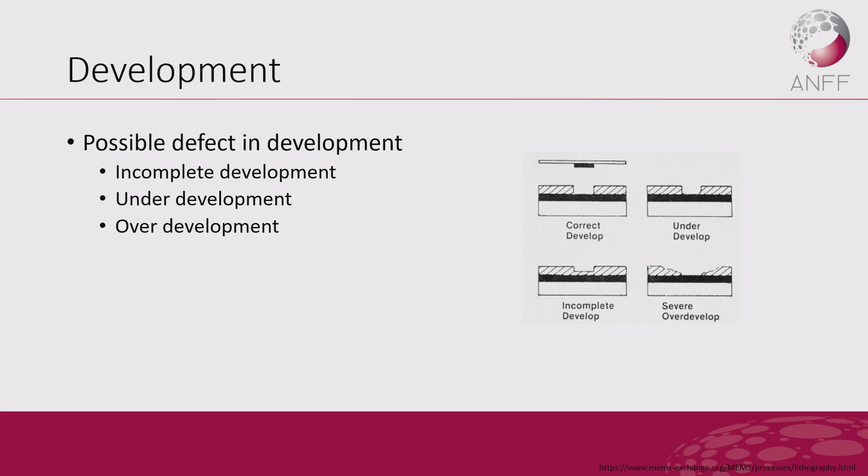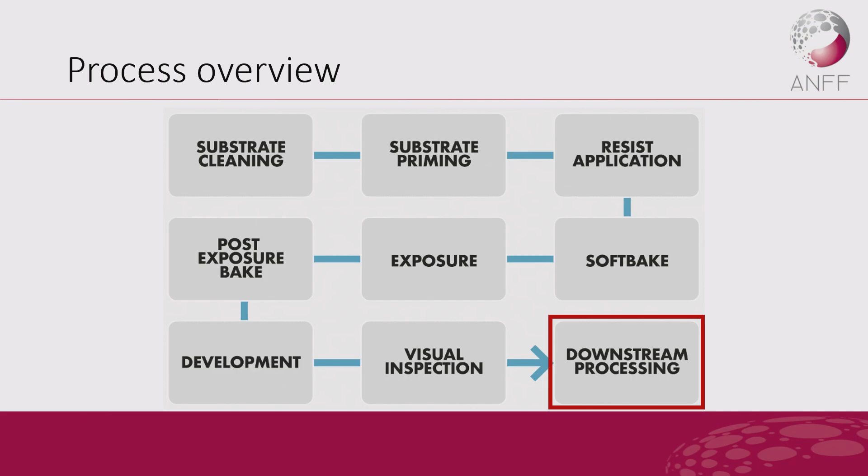Okay, so after your development and the inspection is complete, you will finish your photolithography process. Now you can start doing your downstream process. There are multiple processes we can do. We have ion implantation, wet etching, molding, plasma etching, which is also dry etching, electroplating, and the lift-off process. You will use some of them in your practicals. Yep.

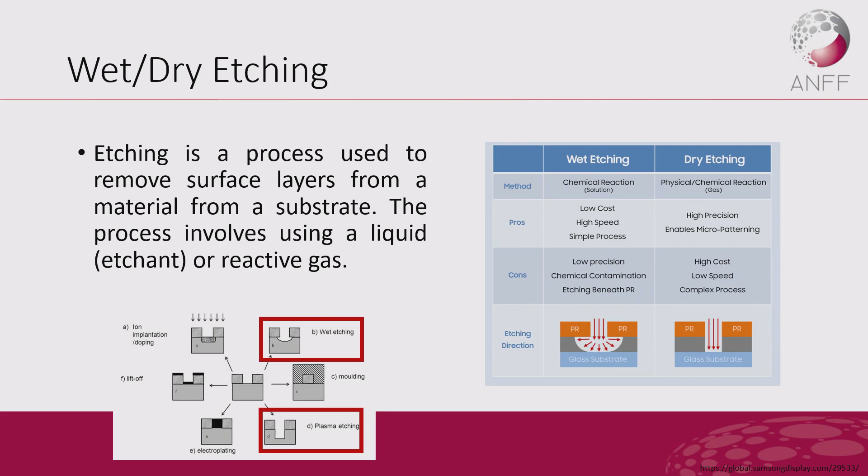The first is wet and dry etching. Etching is a process used to remove the surface layer from the material. So with wet etching, as you can see from the words, we just use wet chemicals to etch the material. The dry etching uses gas or plasma to etch the material. You can see the profile is very different. And then you need to select one of them based on your application.

And the next one is lift-off. Lift-off is done by performing photolithography on your wafer before coating your material. So I'll just give you a quick process. First, you apply the photoresist on your substrate, and then you pattern it. Now you start coating or sputtering your material on top of the photoresist and the wafer. And then you put this wafer in the solvent, most of the time acetone, so you remove the photoresist part. Then you will leave your material on top of your substrate.

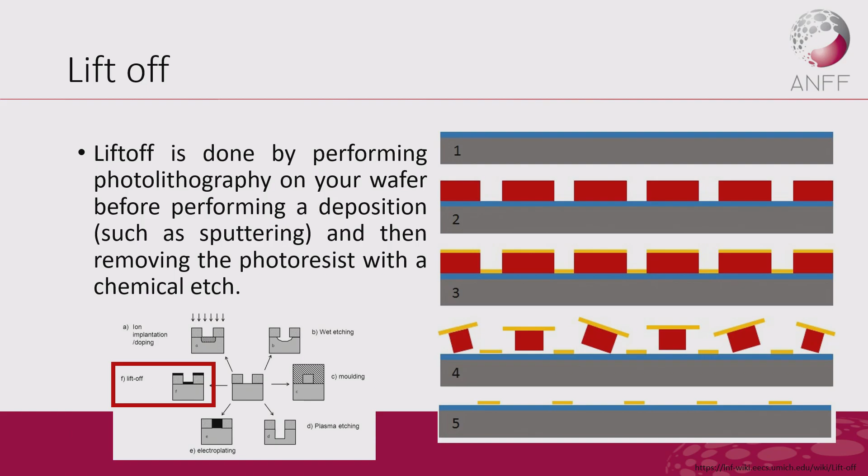The next is PDMS soft lithography. This will create a mold. We create the mold, and then we apply the PDMS on top of the mold and cure it at 65 degrees. Then we can transfer the pattern from the mold to the PDMS. This will be one of our practicals, so you're welcome to join us to have a look.

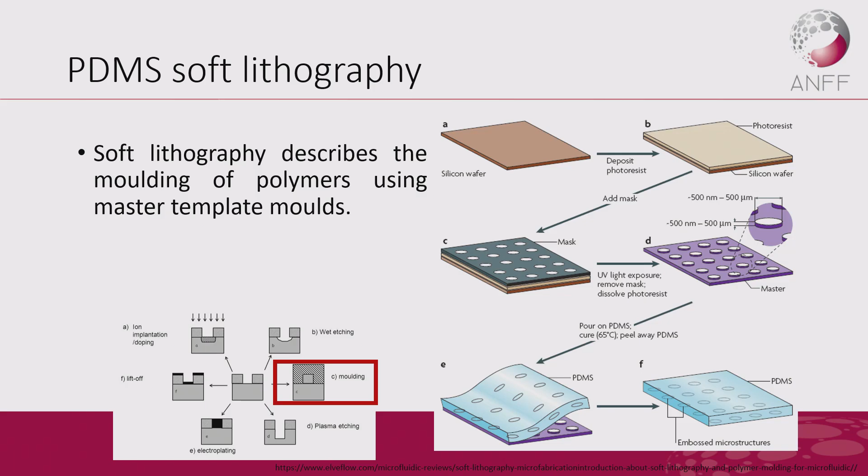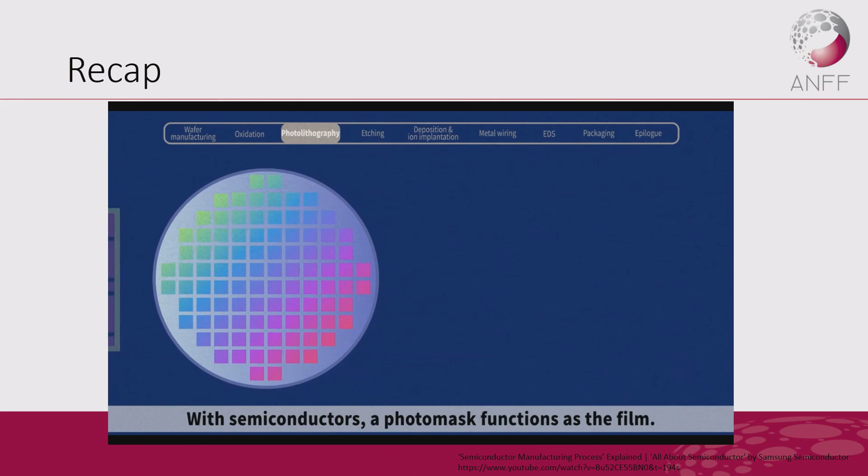So let's just have a quick recap of this photolithography process. The building up process begins. Just as you draw blueprints to build a building, you draw a circuit design onto a wafer, which is called the photolithography process. It is called photo for short because it is similar to developing a photo taken on a film camera. With semiconductors, a photomask functions as the film. A photomask is a glass substrate with a computer-designed circuit pattern. In order to draw the circuit on the wafer, the photoresist, a material that responds to light, is applied thinly and evenly on the oxide film previously placed on the wafer.

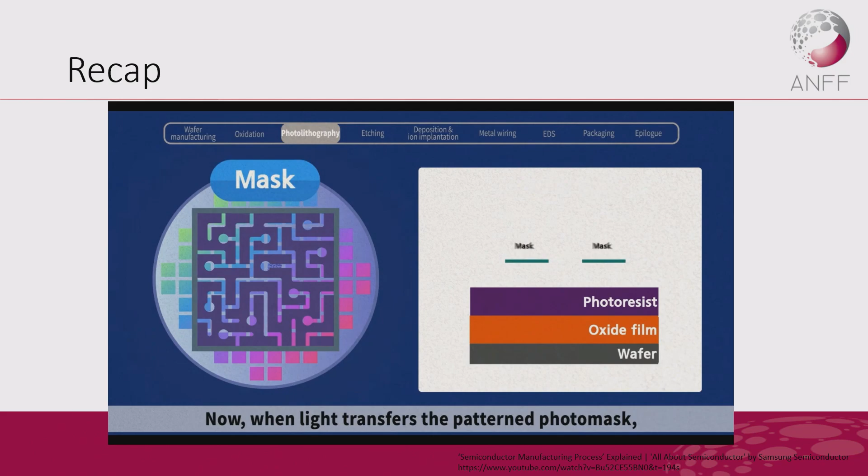Now, when light passes through the patterned photomask, the circuit is drawn on the wafer surface. Just like developing a photo, a circuit pattern is imprinted on the wafer by spraying developer and removing unlit areas from the areas that are exposed to light. After an inspection of the wafer to check whether the pattern is drawn well, it moves on to the next step.

Okay, so I'm sure the past 1 minute maybe explained it better than I did in the past 30 minutes. But if you have interest in photolithography, just like Jen said, we have ANFF Enlighten. On our website, there is a series of micro nano fabrication and photolithography online lectures. You can have a look. Thank you.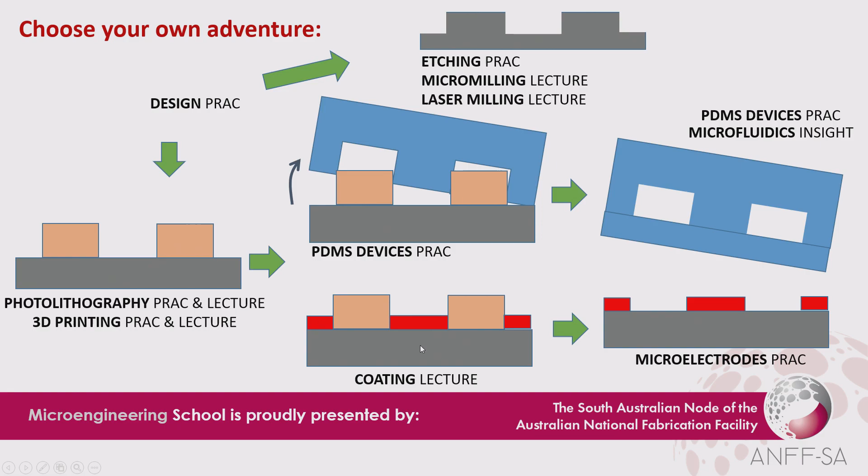And I'm just going to quickly show you two examples from your pracs. You're going to work with some electrodes that will be fabricated using this case where we put down a metal coating, we then do photolithography, and then we do etching. One click too many. Then we do etching to arrive at this patterned surface, which you can see down here. And I've put here the different lectures and the different practicals that are linked to this, what looks to be a reasonably simple step. So the knowledge that you're getting this week really fits together, and I hope you'll really understand that as the week goes through.

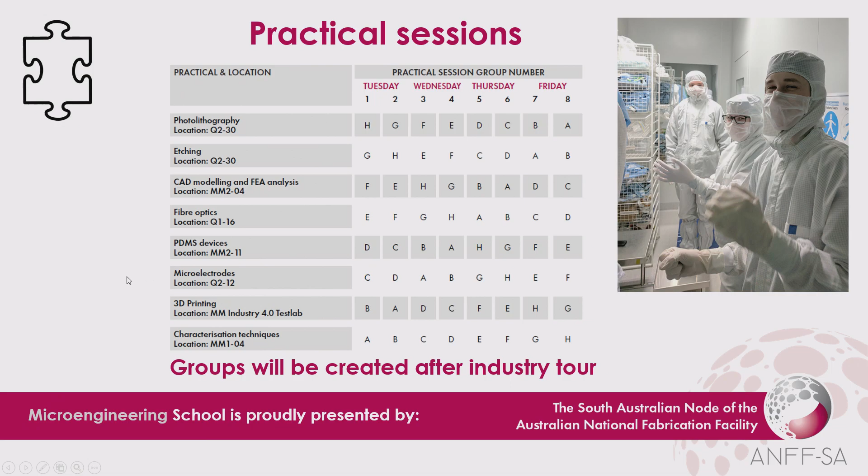The practical sessions, there are 8. They're fantastic. Don't miss them. Even if you think one's not interesting to you, get to know the people involved. The groups will be created after the industry tour. So again, hang around. Don't wander off too far after lunch, so we can get you into the groups and send you off to the right locations. A couple of tips for the rest of the week. Attend every part of every day. It sounds like I'm a parent. I'm not telling you to do it for me, I'm telling you because I think it'll be the best way to get everything out of it, because it fits together. I don't want you to miss any important steps in your own fab.

Introduce yourself to people, ask questions, don't be shy. Take notes about lectures, people, companies, careers. You might forget some names or faces and email addresses. Get to know each other and connect that way. Tell someone what you learn each day. When you get home, hopefully there's somebody you can call, text, talk to. Tell them what you learned that day, because that's a great way to make sure it stays in the mind for more than 24 hours. So take home the piece from your prac and tell your mum or your pet about what you've done. This is important when you're famous because of the amazing innovations, the Googles, the Navitas, whatever you've come up with. Remember us, because we want to know your stories when you get out there. So that's just a few things. Let's go to lunch and I hope you enjoy the rest of the school.